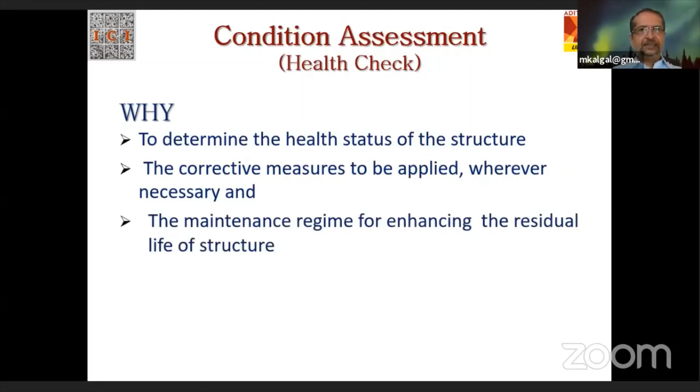To apply some corrective measures wherever necessary. Just like when we do our health check, it is first to check whether we are all right. And if there is something slightly wrong or of concern, we would like to go to a doctor and see what needs to be done or what care should be taken in our day-to-day life. The third thing is to also evaluate what maintenance regime we should undertake so that the residual life of the structure is enhanced.

So again, I will continue the analogy of our health versus building health. When we are diagnosed to have something, maybe diabetes or blood pressure, the doctor will tell us how we should change our lifestyle so that we are able to take control of the situation and live longer. So that is the same thing with the building also.

Sometimes, as far as building assessment is concerned, not connected to human health, we might do this condition assessment to see if there is a possibility of changing the use of the structure. The structure might have been built as a residential building. You may want to convert it to a commercial building, remove a few walls, make the hall bigger, and use it for commercial purposes. Or a part of it you might want to use for storage. So it's possible you may want to change the use of the structure, and hence you may want to see whether it is worthy or possible to do this change and use it for the new application you are thinking of.

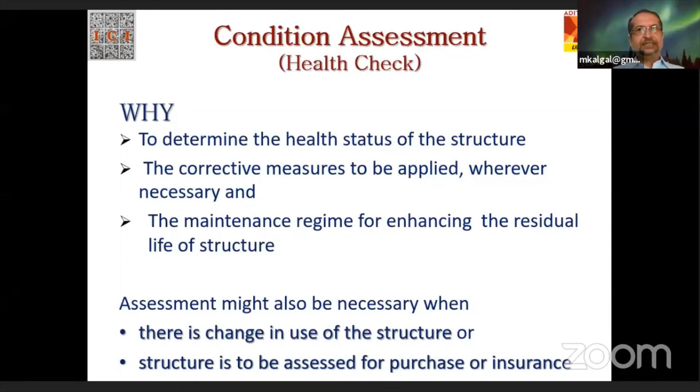So even in a building, if they want to insure it, to decide the premium, they would like to know what is its condition and what is its residual life. So condition assessment or health check is done for various reasons.

Now, what is it that is involved in a condition assessment? First is examination of the structure through comprehensive physical observation. So when you go to a doctor, what does he do? He will first look at you, and then he will probably take the measurement of your heartbeats.

He may keep a stethoscope on you, and he may also ask you a few questions. Same thing, we examine the structure through comprehensive physical observations and then carry out relevant probing tests, like the doctor would do to you. So some tests will be done on the components of the building and constituent materials, and it might be aided by some supplementary theoretical analysis to see what kind of loads, moments and shear are coming on various parts of the building, and in light of that, whether it is capable of withstanding those or not.

So some definitions are definitely required before we go forward. One is the word defect. Now, what is a defect? One of the definitions I found suitable is that defect is a flaw which creeps into the structure because of design mistake, poor workmanship, fabrication or construction, before it begins its service life.

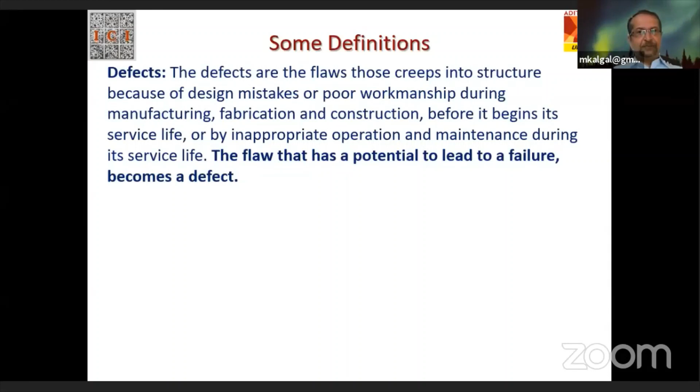Now, what is distress? Distress is a collective term for the physical manifestation of problems. So there can be several problems which are inside. Now, these are shown just like in a body. When it has any problem, the first thing that happens is you get a fever. What does fever mean? It means something is wrong with the body, and the body is trying to fight by raising its temperature.

So the same thing is here. The manifestation of such problems, like cracks, spalling, pop-out, staining, etc., or some signs of corrosion, all of these are symptoms. So distress is a symptom to indicate that there are defects, right?

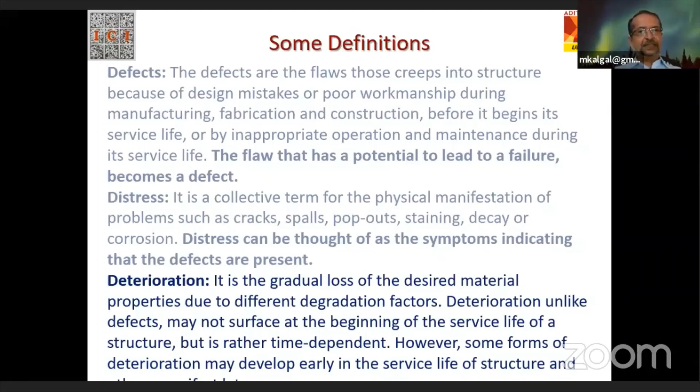So the third word is deterioration. Now deterioration is what? Obviously the English meaning itself will tell you that it is a gradual loss of the desired performance. So the material properties might have got degraded, or there might be issues which might be reducing the strength and service life of the structure. The major thing to remember here is that it is over a period of time, so this is time dependent.

So some small types of deterioration may develop early also, like you have shrinkage cracks, which look as if the concrete is now deteriorating. Actually, it's not deteriorating, but it's a symptom which has come at the early life. But then most of these deterioration issues come a little later in its life.

So what's the objective of the condition survey? It is to identify the causes of distress and their sources. So the first and foremost objective of the condition survey is to identify the causes of distress. Distress can be for various reasons.

As I said, you may get a fever, but it could be for various reasons. You may get a headache, it might be for various reasons. Even an upset stomach can create a headache. So you must know what is the source.

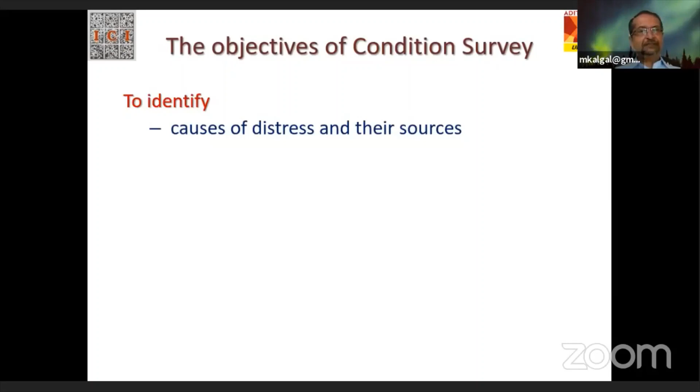So the source of the distress or the causes of the distress have to be identified. That's the first objective of a condition survey. And then it is to assess.

Now, once we know that there is a distress, we have to find out what is the extent of distress. How much is the distress that has spread in the body of the structure, whether it is localized at one place or the overall structure is suffering.

Then once we know that there is a distress, there is a degradation that's happening, we would also like to know what is the strength of the structure. Now, what is residual strength? How long it can withstand? What is the existing structure's strength?

Then the third thing is rehabilitability. That is, whether you can rehabilitate or not will depend on what is the distress and how much is the degradation that has happened. So if a man gets into a hospital with a heart problem, they'll see by doing a bypass whether his heart can come back to near normal or at least 50-60% of the normal capability. If it has already lost all its capability and its efficiency has reduced to 20% or 30%, it is not possible to revive that patient.

So it may not be possible to do any rehabilitation of a building if the residual life is very less or it is in a very bad shape. So this is the second objective. One is to identify, second is to assess.

The third objective of the condition survey is to prioritize which are the elements which are distressed, which is the major distress, which is the one which needs to be tackled first, what is serious, and what needs to be taken up for repairs. So since this entire faculty development program is on repairs and rehabilitation, it's of primary importance for us to do this condition survey to decide on the repair and rehabilitation or retrofitting methodologies.

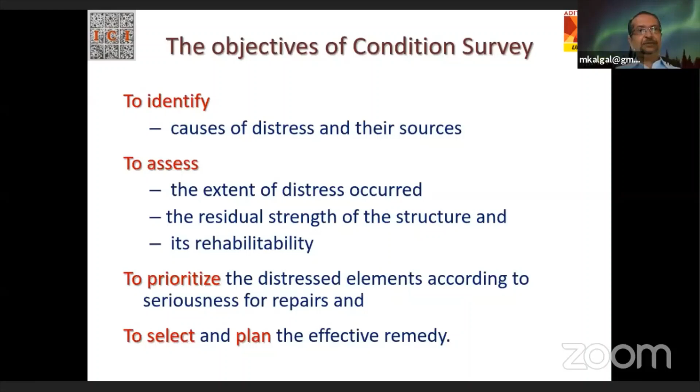So to prioritize which one to do first, 1, 2, 3, 4, 5, you must do a condition survey. Also, it will help you to select and plan the effective remedy. We will see how we can select some of the possible methods of remedy out of hundreds of possibilities that are there. The condition survey will help you to tell which is the one which you should choose, or which set of repair methodologies you have to choose, and what priority you should start doing the repairs.

So the most important thing, as I went on repeating, is to find the cause. Unless you know what is the disease, no medicine can be given. Similarly, we have to first try to find out what is the cause, and then automatically the remedy will be a common sense issue many a times.

What we should realize, just like in human body, in the structure, the cause of distress may be, the source may be somewhere else, and the cause of distress may be something else, but what is seen could be a totally different picture. For example, a simple thing like damp patch. A damp patch could be for various reasons, and the origin of this dampness might be somewhere. It may not be just behind the damp patch. It might have traveled from somewhere. Unless you arrest that source of the dampness, you will not be doing any good to the structure.

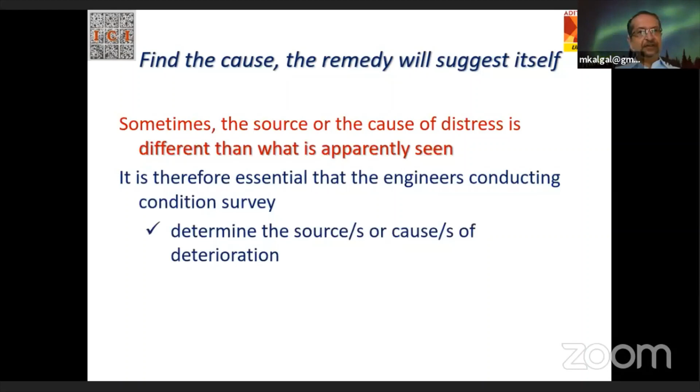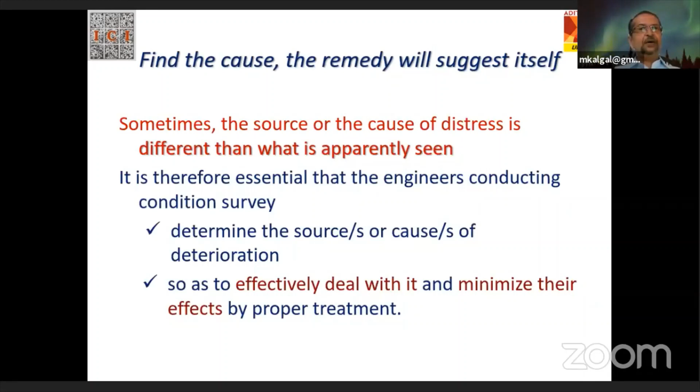But at the same time, you must also realize that it is important for us to find out whether the cause is somewhere else and we should deal with that cause. Unless we do that, the whole thing is not comprehensive.

So the choice of method and the devices that we use for condition assessment itself depends on several factors. The reasons for the test. Why do you want to do this condition assessment itself? That itself will decide what are the methods that I would like to use and what are the devices that I would like to use.

The cost involved, everything costs. So the condition assessment also, how detailed you want to do, how comprehensive it should be, will depend on involvement of several engineers, workmen, equipment, and so on and so forth. So it involves the cost. So how much are you ready to evaluate, spend for evaluation?

Just like when, going back to the human body, the doctor tells you a few tests to be done, and every test will cost you. So depending on your financial condition, depending on the priority of the tests that need to be done, the doctor will decide how many tests should be done, which is mandatory, which is optional, and so on. So the cost involved is an important factor to choose the method and device for condition assessment.

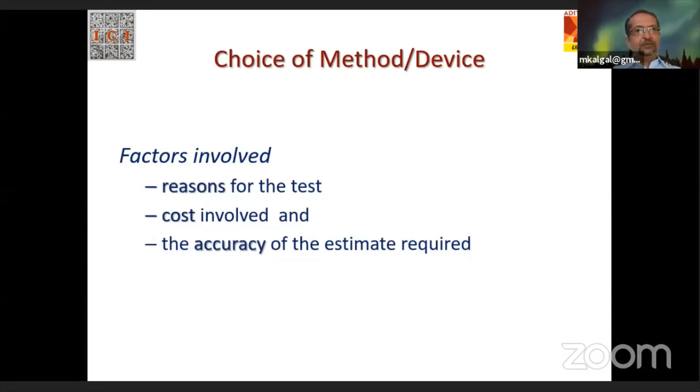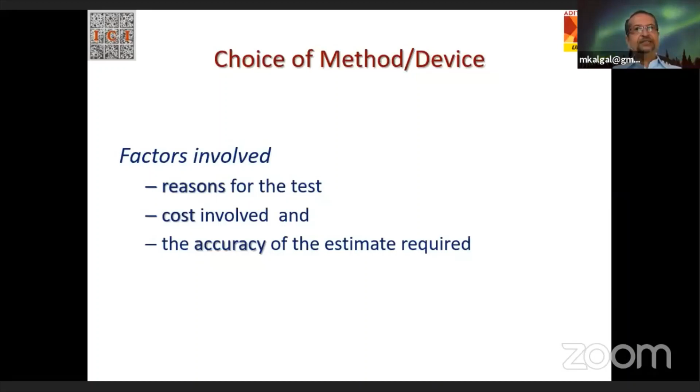The third thing is the accuracy of the estimate. This depends on how sophisticated and detailed your investigation is. If you want to know very accurately the strength of a structure or component, how much deflection has occurred, and whether that deflection is dangerous or going to increase, you will have to do a much detailed condition assessment to get a very accurate result. But if you just want a rough idea, in Hindi they say 'mota moti', whether it is okay, a good engineer can just visit the site, look at it without doing any tests, and give you a fair estimate. So the accuracy also decides the choice of method and device.

So the causes of distress can be many, many, many. It's almost impossible to put a full comprehensive list, but generally we can categorize them. One is the atmospheric effects which cause distress in the structure. It could also be due to the natural aging of the building in the environment it is in.

The major effects are carbonation, chloride attack, sulfate attack, and so on. I'm not getting into the details of how carbonation or chloride affects the structure. This afternoon you will be having a wonderful lecture by a very eminent engineer, M.N. Ramesh, who will give you all the details and chemistry involved in atmospheric effects like carbonation, chloride attack, sulfate attack, and so on. But suffice to say, one of the major causes of distress is atmospheric effects and aging.

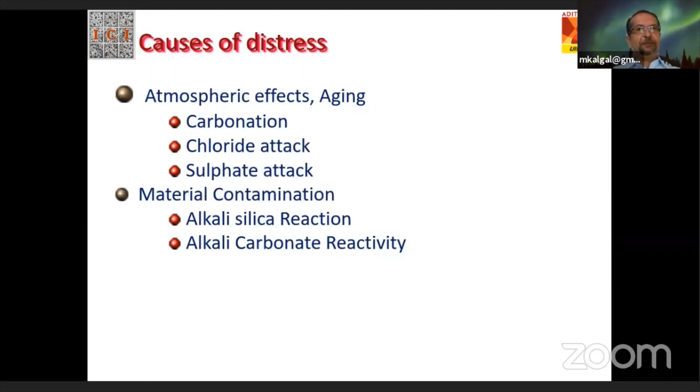Second is material contamination. When you started using the material itself, if it had not been tested properly, there is a possibility of alkali silica reaction, alkali carbonate reactivity, and so on. The third thing is, at the time of construction, if there were some deficiencies, that can also cause problems or distress in the buildings.

There could be a defective design and detailing. The design itself might have been defective, where certain loads were not taken into consideration, or loads were taken in the wrong fashion. Or even if the design is done properly, the detailing might not have been done properly. This also can cause distress.

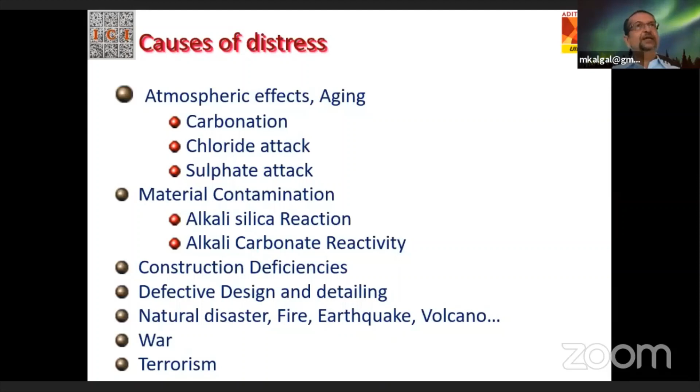It's also possible that although everything is done well, there could be a natural disaster like what is happening now. Nisarga came, before that Amphan came, and there can be cyclones, storms, tsunamis and so on. There could be a fire accident, an earthquake, or in some countries even a volcanic eruption. These are possibilities which might have caused distress in the building. A war, bombings, or due to terrorism, some blast here and there would have also caused the distress. So there are many reasons why distress would have occurred.

So when we do a preliminary investigation, which is a very important part of condition assessment, the goal is to provide initial information regarding the condition of the structure. This initial information also tells you the type and seriousness of the problems affecting the building. It also gives you an idea as to what are the intended rehabilitation techniques that can be applied.

You may think of hundreds of rehabilitation techniques, but it might not be feasible to do it in that structure under the given condition. Let us say it is an operating office or an operating factory - when operations are on, you may not be able to shut down the entire factory and take up rehabilitation. But of course, if it is very dangerous and very important, you may have to do it.

One of the ideas you get from preliminary investigation is the feasibility of performing the intended rehabilitation. It also gives you information on the need for detailed investigation. This preliminary investigation will tell you whether you need to go for a very detailed investigation.

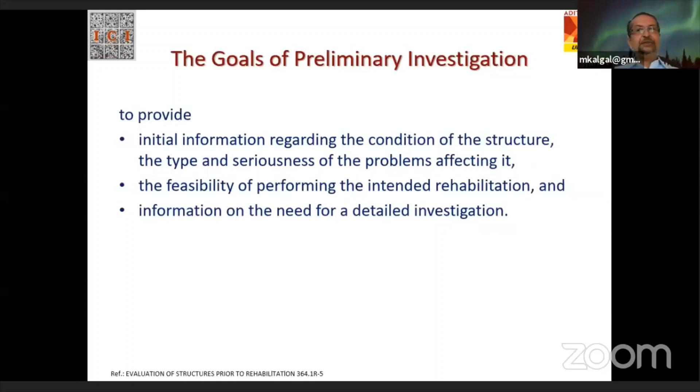It won't work that you just go and see and get the whole picture. So when this preliminary investigation is taken up, because of those objectives, the scope and methodology can involve one or more of the following steps depending on the size and complexity of the project.

The first step is to review the plan, specification, and construction records. Many times the buildings don't have these plans, specifications, and construction records. And even if you have plans, many times changes were made during construction, so you may not have as-built drawings, as-built material specifications, or as-built construction records.

If you can get at least some plan, specification, and records, to that extent you will be lucky. Once you get that, you must go through it thoroughly to understand what kind of building you are going to visit. Before even going to visit, you must look at these records if available.

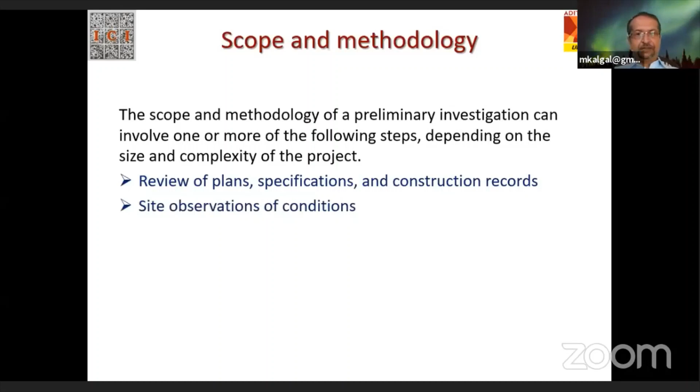Then you must go to the site and start observing the conditions there. It may also be necessary to measure some of the geometrical features to check whether it complies with the drawing, and measure deflections and other things if observed.

The deflection won't be in the drawing, so you have to make some measurements to see what the deflection is, whether it is within limits, how many years have passed, and whether it is due to short-term or long-term deflection.

If there is some displacement of a foundation or a crack in the wall, you may have to take certain measurements, and all these measurements are for assessing the damage preliminarily.

Then you may also go for some non-destructive testing. There are several non-destructive testing equipments—Dr. Balasubramanian will talk about this in detail. So you may carry some of these instruments and do some non-destructive testing there.

The simplest non-destructive testing equipment, according to me, is a hammer and a chisel. Even that is equipment. But an intelligent engineer can get a lot of information from that too. We will look at it in the next few slides.

It's also possible that you may carry a chisel and do some exploratory removal—that is, if you see some stain or something and suspect corrosion, you may slightly chip off some portion to see what it looks like inside. That's called exploratory removal. You're not damaging the structure, but doing some small chipping here and there.

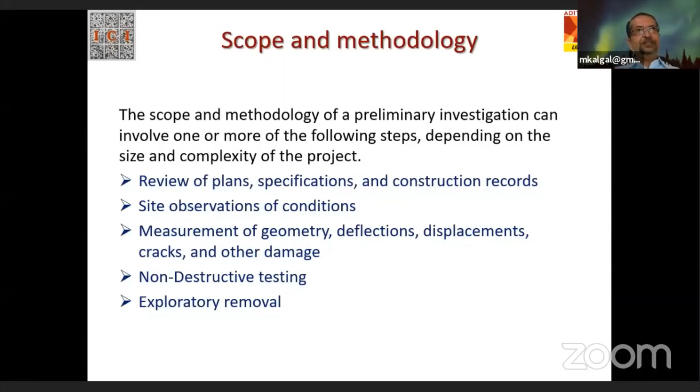You may also do some sampling, testing, and analysis. You may take out some materials and send them for testing, or take out a part of the reinforcement to see whether the diameter has already reduced and the strength has reduced, and so on, and analyze these samples.

The detailed studies are generally not done in the preliminary investigation. They are deferred until a detailed investigation phase is planned. If that investigation is deemed desirable, detailed studies are generally taken up in the next stage.

Now, this visual inspection, when you go to the site, is phenomenally important—the data given when you go there for visual inspection. What is important is that it is a qualitative method, not a quantitative method.

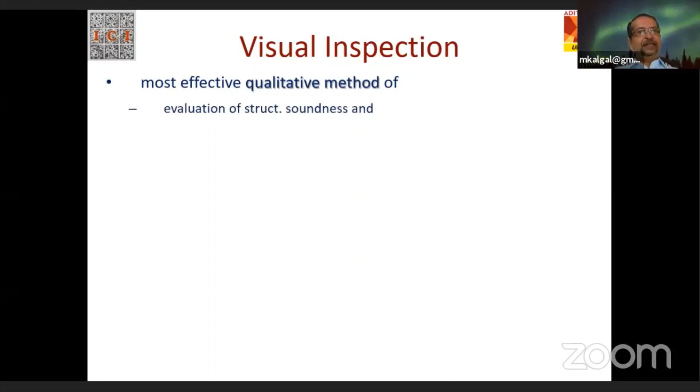Just by looking at it—like some people ask you to go to the site, look at the soil, and estimate the bearing capacity—it's not possible. You can only say whether it is good, better, best, or worst. That is a qualitative method. So visual inspection is a qualitative method. It can give you some idea about evaluation of structural soundness, and it helps you identify the distress symptoms together with associated problems, providing valuable information to an experienced engineer.

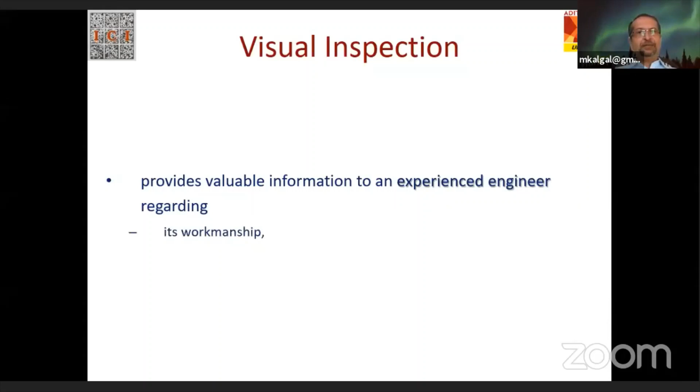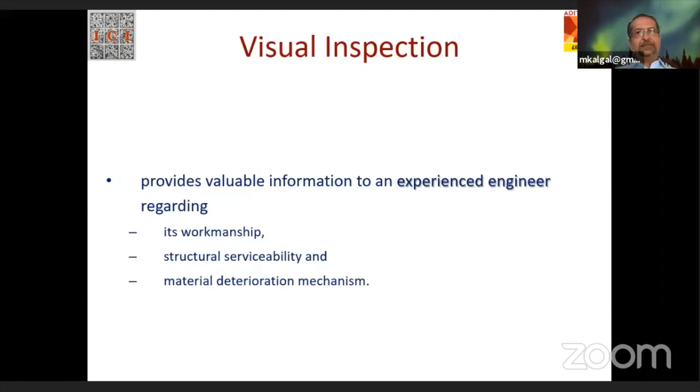It gives you some idea about its workmanship, structural serviceability, and material deterioration mechanism—what is it that is deteriorating the materials there. An experienced engineer, by look, can get some idea. It's also meant to give a quick scan of the structure to assess the state of general health.

So the record of visual inspection is an essential requirement. It's not that you go there and come back as if you have gone for an excursion—no, everything will have to be recorded. This is important because memory overlap is there: when you see something else, you will forget what you have seen earlier. So as you start looking at it, you should start recording what you have looked at and what you feel can be the cause for the problem.

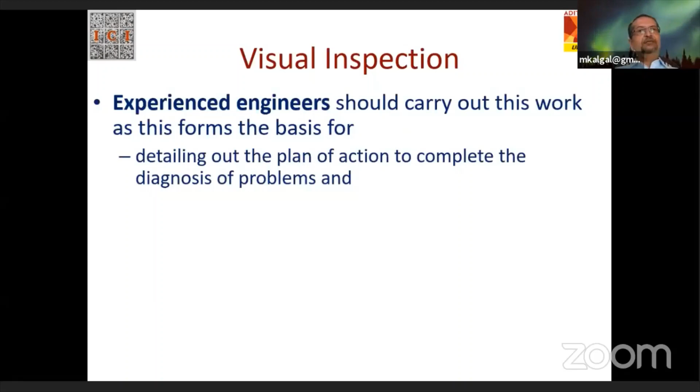This will also help you prepare a realistic bill of quantities for various repair items later. So in visual inspection, it's very important that experienced engineers carry out the work, because it forms a basis for detailing out the plan of action for diagnosis of problems. It also quantifies the extent of distress, and that's very important.

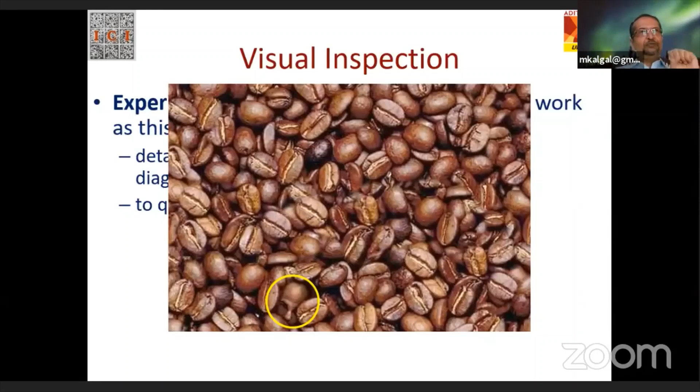What is trying to be emphasized is that there is a difference between seeing and observing. An experienced engineer observes—he will not just see and come. He will know what to look for, where to look for, and how to identify. That's very important in a visual inspection.

Simple tools he will carry, like I said, camera with flash, magnifying glass, binoculars, because he may not be able to reach the place where the distress is. He may carry a crack gauge for measuring the crack width, a chisel and hammer—this is what I meant as the preliminary NDT equipment usually needed. Sometimes, of course, some platform, scaffold, tower, etc. may be required to access the particular place of distress.

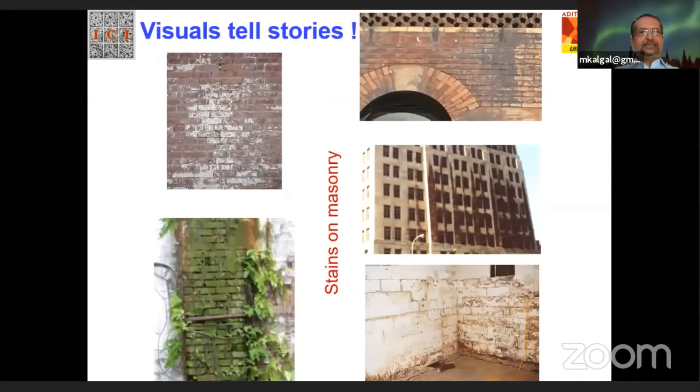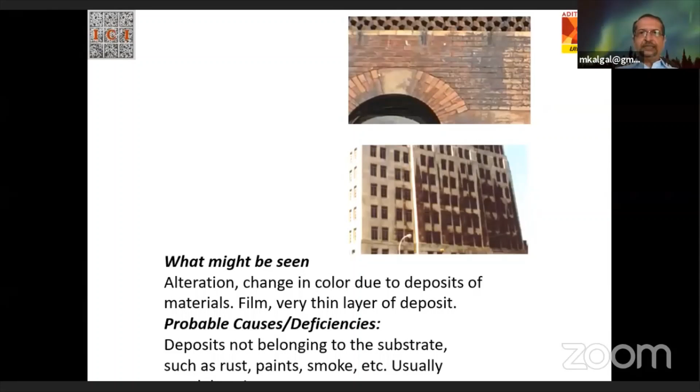Visuals tell stories. An experienced engineer, by looking at the visual distresses, will come to know the stains in masonry, for example—just taking one or two examples. The stains in masonry, which you can see in these pictures, can tell you different stories. For example, the first two, what you might be seeing is some alteration, change in color due to deposits of materials, a very thin film or layer of deposit. The engineer will automatically, immediately grasp that the possible cause is a deposit not belonging to the substrate, like rust, paint, smoke, etc., and he will know these are not very dangerous to the building—it only requires a cosmetic treatment.

If he sees what we call efflorescence—the formation of white substance on the surface, which is powdery, filamentous, or crystalline—he will know this is possibly due to water flowing through the masonry, or from the backing or from the soil. Again, he knows this is not a very dangerous thing; it can be cleaned and continued. And again, looking at the intensity, he will know whether it requires a detailed repair or just cleaning and covering up.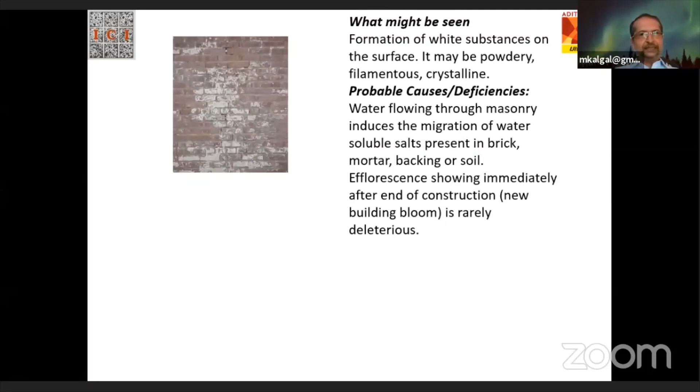This picture—because it's in a basement, a damp patch, changing color—all of this will indicate to him that there is probably a high water table at the back, or water feeding due to some broken pipes, improper waterproofing, and so on. So seeing will give a lot of insight into what could be the issue.

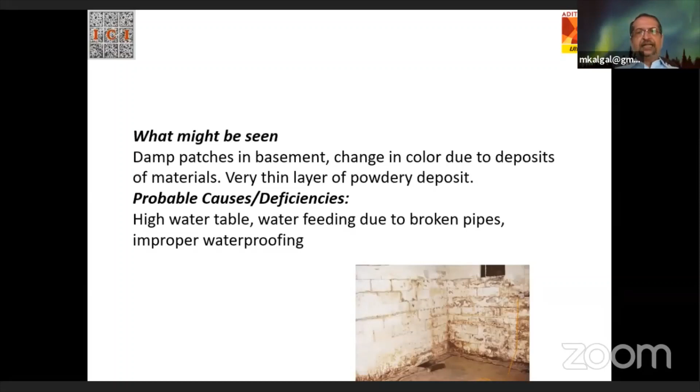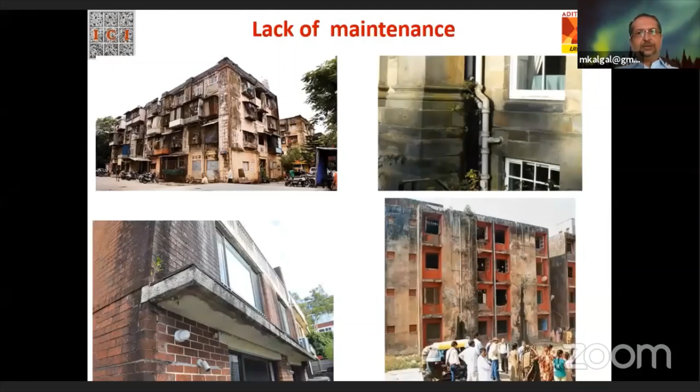If he looks at this kind of scenario, he knows obviously that the maintenance has been absolutely lacking, and hence all of these issues have come. So 99% of these kinds of issues are due to lack of maintenance, or it could be due to poor workmanship. Poor workmanship could be like this: in RCC, inadequate cover due to congestion of reinforcement. There are so many reinforcement rods at the bottom that concrete could hardly come in and give cover to the reinforcement—so obviously the cover fell off.

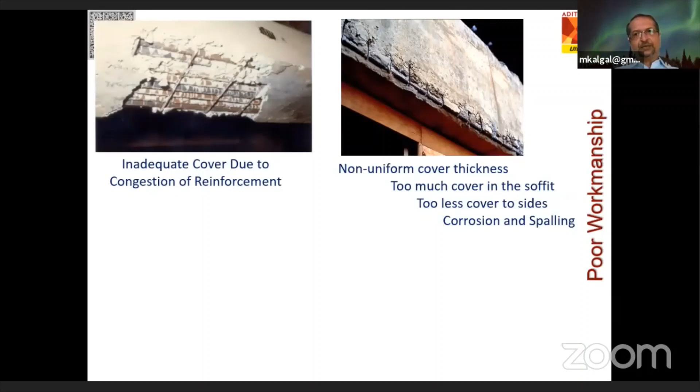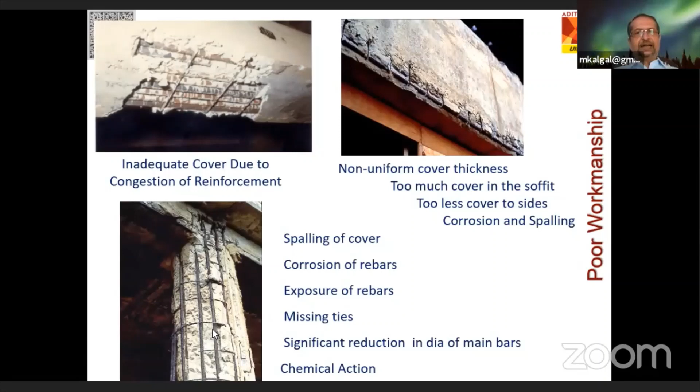By looking at this picture, he can say that this was a construction deficiency or defect. There was more than required cover at the bottom, very less cover at the side, and this has created corrosion and spalling of concrete. When he looks at a column like this, you can see there are so many stories being told - there is chemical action, the cover has spalled off, reinforcement has corroded. You can see these ties are totally eaten away. There are no ties here and here because of extensive corrosion, significant reduction in the diameter of main bars, and so on.

These cracks in concrete are due to various reasons - there are hundreds of reasons for cracks in concrete. If you were to classify, cracks could occur before hardening or after hardening. Before hardening, it could be in the plastic stage - due to shrinkage or settlement, or when it is still not hardened or strong enough, movement of the formwork, subgrade movement, or late jointing might have created cracks. In the hardening stage, it could be physical, chemical, or thermal phenomena - all of these can cause cracks.

Just by looking at a crack, it's not easy to understand the issue, because unless we understand what is the disease, we can't give medicine. Please remember that. It could be due to drying shrinkage, crazing, sulfate attack, restraint shrinkage - all kinds of problems are possible. Chemically, it could be alkali aggregate reaction, corrosion in reinforcing steel, carbonation, and so on. Due to thermal, it could again be high temperature gradient, shrinkage, etc. Or it could even be structural - overloading, improper design, excessive movement, and so on. So cracks in concrete are the most difficult to understand, handle, and repair.

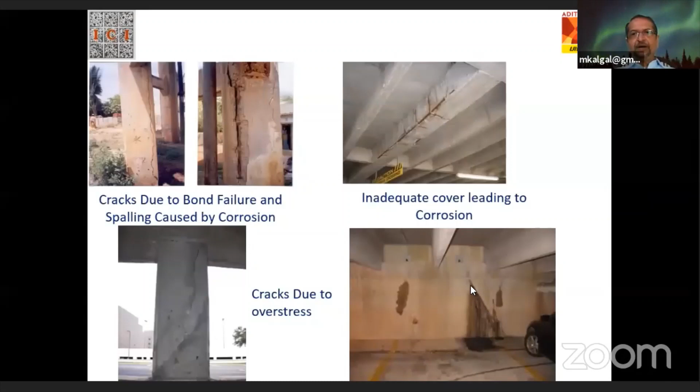You can see some photographs which again emphasize a water tank supporting structure, extensive cracking due to bond failure and spalling caused by corrosion. You can see here there was hardly any cover to the reinforcement, so there was corrosion and spalling. This is a vertical load carrying member like a column. There are cracks here which probably indicate overstress of this particular column, and the column is about to fail. It's also possible that cracks can get compounded due to leakages, like what you can see here in a basement - there is a crack in the retaining wall, allowing water to come inside.

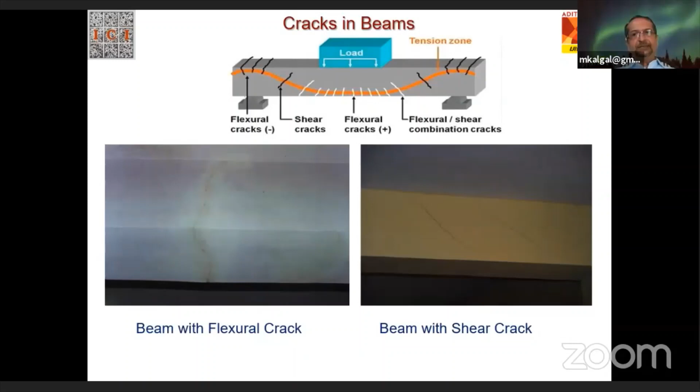There are so many structural members - columns, beams, walls, and so on - so the cracks can be at various places. The fundamental thing to remember is that crack occurs where there is tension. Looking at the position of the crack, the way the cracks have grown, you can understand whether it is a flexural crack or a shear crack and so on. All of you being teachers, I don't have to explain this in detail. So you can see a beam with a flexural crack in the middle at the bottom growing upwards, and a diagonal crack near the support, which is obviously a shear crack.

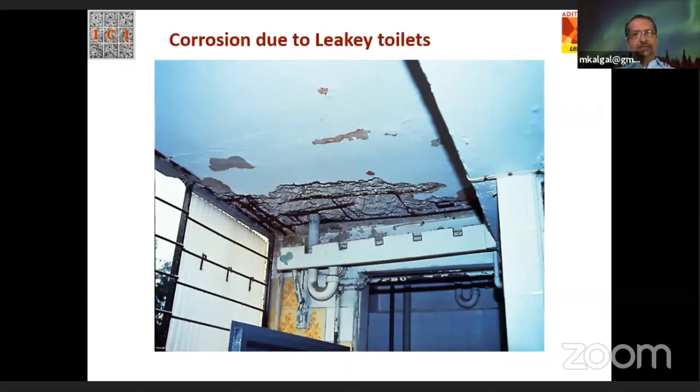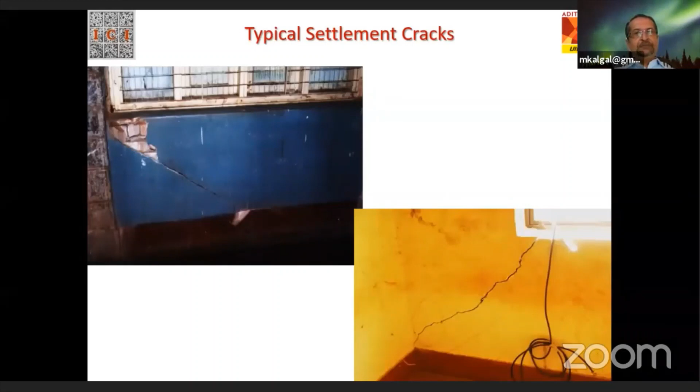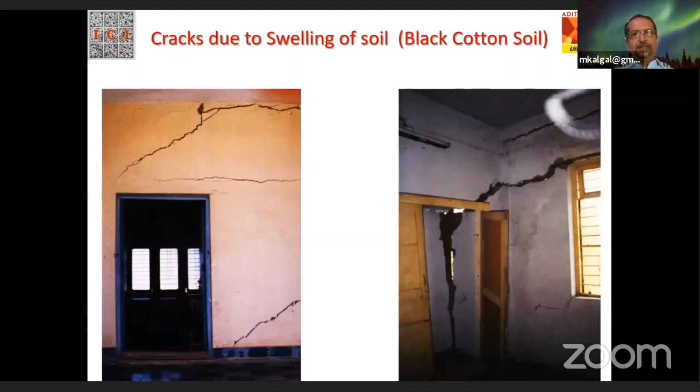It's also possible that some settlement might have occurred, the foundation might have settled. So cracks like this might be seen in a building having foundation settlement, or more importantly, differential settlement. This is a typical photograph of very bad expansion of the soil causing extensive distress. This building is almost worth demolishing rather than repairing. This is due to swelling of soil, that is Montmorillonite or black cotton soil.

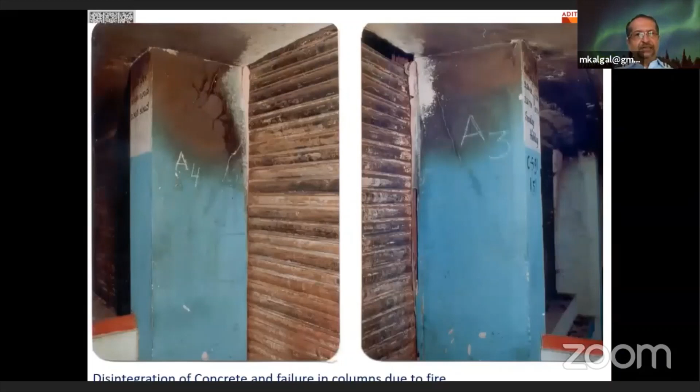This is a typical photograph of fire damage. You can see the column, beam, slab - all of them have spoiled. The temperature has gone beyond a certain level, so the distresses are seen - one in terms of what has fallen off, the other is the color of the concrete, which tells you the kind of damage that has occurred. So this is again some columns, A4, column A3 - some portion of the concrete is already disintegrated, some cracks have come due to a fire accident.

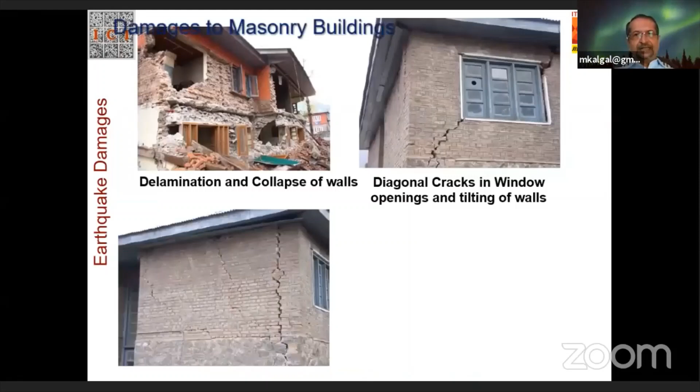Earthquake is very difficult to predict, but it is possible to make buildings somewhat resistant. The most damaged buildings in an earthquake are masonry buildings, which can suffer delamination and collapse of walls, diagonal cracks, vertical corner cracks, and total collapse of random masonry, among other damages due to earthquake.

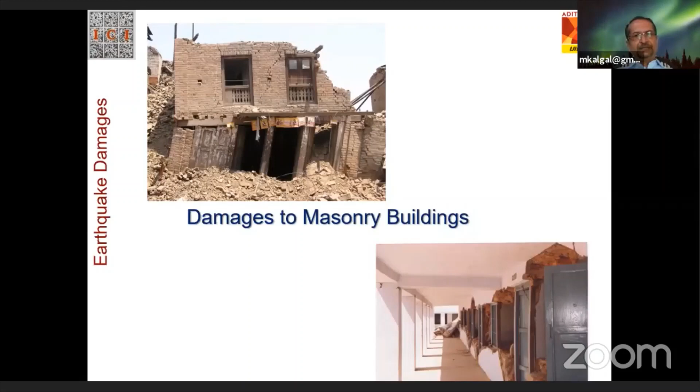If the damages are very bad, probably nothing can be done, but if it is minor, you could look at some kind of rehabilitation even in an earthquake damaged building. Earthquake damage could also cause shear failures in beams and total destruction of columns, and so on.

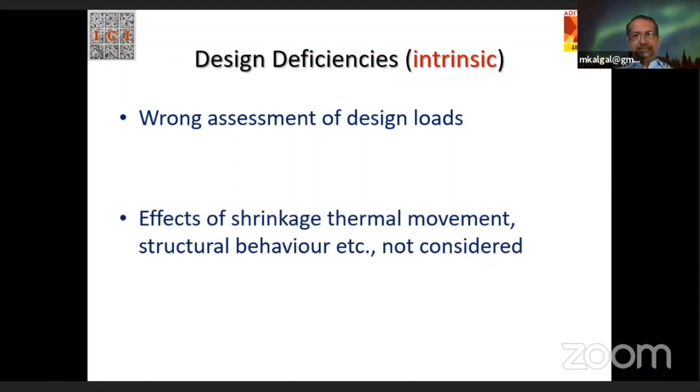So there are two types of distresses or deficiencies. One is called intrinsic deficiency, which is a design deficiency—wrong assessment of design loads, or effects of shrinkage, thermal movement, structural behavior, etc. not considered properly. These are intrinsic, meaning the disease is already built into the structure.

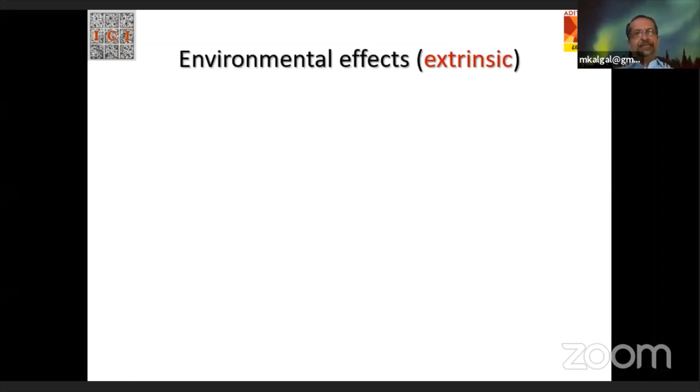There are also what are known as extrinsic deficiencies. These are basically environmental effects—physically, it could be heating, cooling, wetting, drying, abrasion, all due to external agencies causing physical effects on the structure. These are called extrinsic problems. There could also be chemical problems, such as chloride attack, sulfate attack, carbonation, and so on.

Some tests can be done on concrete, but we must remember at the outset that it is almost impossible to obtain a very accurate estimate of the strength of concrete. In most cases, when we are called to the site, they ask, can you find out what is the strength of the concrete? Just by looking at it, it's impossible.

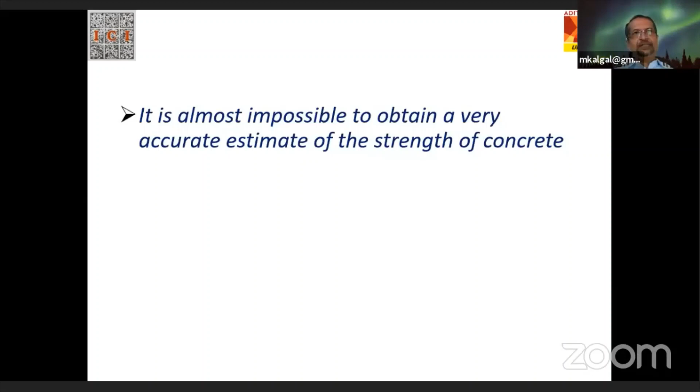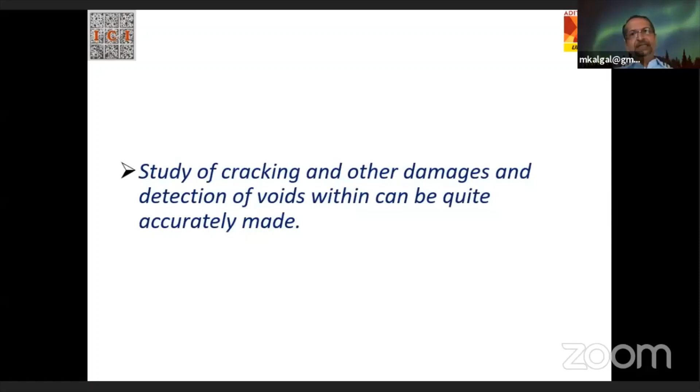Even with tests, it is definitely not possible to give a very accurate prediction of strength. You can come to a reasonable estimate depending on how detailed your investigation is and what data you have. The study of cracking and other damages, and detection of voids, can be made more accurately. The strength of concrete is almost impossible to get with 100% accuracy, but studying cracks and detecting voids can be done fairly accurately with the equipment we have.

So what we should know is the range of tests available, the particular limitations of these instruments, and the accuracy that can be achieved—this is very important.

Anybody can take an X-ray of a human body, but understanding the problem by studying that X-ray requires an expert. Also, if the X-ray is not taken from the right angle, even the expert may not be able to make out the issue. So he should know whether to go for an MRI, an ultrasound, or an X-ray—it is the specialist who decides, depending on his knowledge. There are a range of tests that can be done on a human being.

Similarly, there are hundreds of equipments and hundreds of tests that can be done on a structure. The limitations should be known—how accurate this is, and what the cost effects of doing this kind of detailed analysis are. Once you know the limitations, you will not be disappointed later.

Because tomorrow, if you are asked to do a test and the result turns out not so accurate—say there was a 20% error—if you already knew there could be a 20% error, there is no disappointment. Otherwise, some disillusionment and conflict between the owner and the investigator is likely.

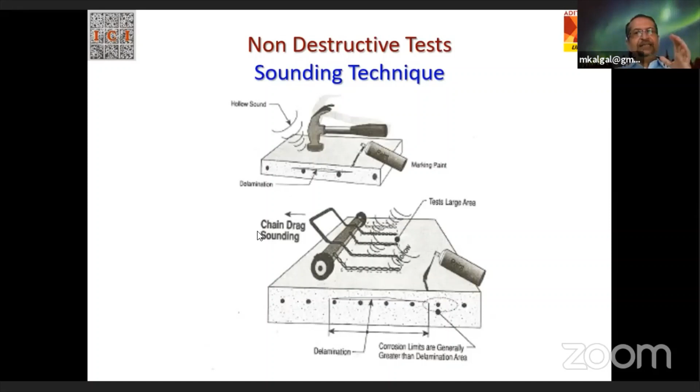There is also another method called chain drag sounding. When you have a very large area, you drag a set of chains on the surface. By closely hearing the sound that comes due to the chain drag, you can decide where there might be a delamination, which could be caused by construction deficiency or corrosion.

In non-destructive tests, there are hundreds of equipments, but the most important ones are called Schmidt hammers, that is the rebound hammer. Dr. Balasubramaniam will deal with this in detail. This is an auto recording rebound hammer. It records on paper or in an equipment, and later there can be digital analysis or accumulation of the data.

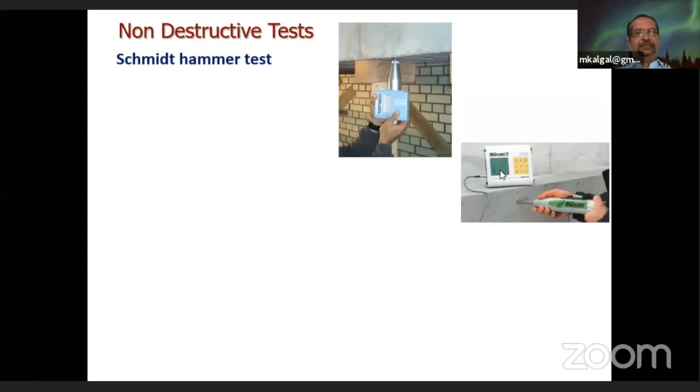There is also what is known as the ultrasonic pulse velocity test. The Schmidt hammer is used to find out the hardness of the material being tested, and hence can relate it to strength to some extent.

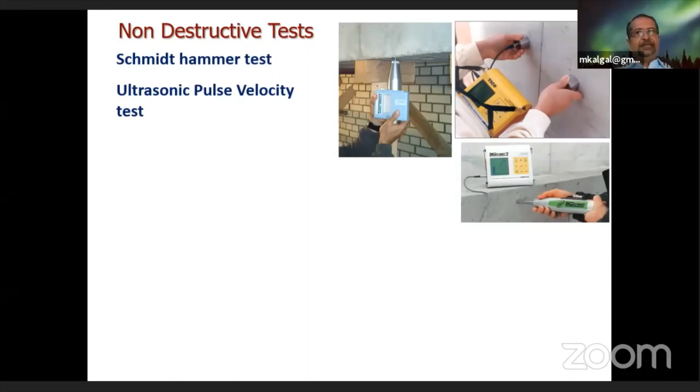Ultrasonic pulse velocity passes pulses into the concrete, and by studying the speed or velocity of the pulse movement, it can find out whether the concrete is dense or not. It will also find out if there are any voids or cracks in the concrete, depth of concrete, and so on.

There is also what is known as a profometer or cover meter, which tells you the depth of reinforcement, the spacing of reinforcement, and to some extent the diameter of the reinforcement. These are important for us to assess when we don't have any drawing, to know the strength of that column or member, whether it is slab or whatever.

It's also important to know where the reinforcements are, because for the pulse velocity test, you should not pass the pulses through the reinforcement. Otherwise, the pulse will pass through the reinforcement and give a false indication that everything is fine. So you should avoid reinforcement when testing concrete.

There is also what is known as half cell potential measurement, which tells you the corrosion activity, how prone the structure is to corrosion, whether it is already corroding, whether it is in a dangerous state, etc. You can find this out from the half cell potential meter.

You can also take a core of the concrete at places where you have doubt, which gives you a physical view of what is there in the depth of the concrete. By testing the core, you can also find out the in-situ strength of the concrete.

You can do a load test of a particular panel to see whether it can take the load. These are all non-destructive tests and they will not damage the structure. Core testing, yes, small cores will be damaging, but then you can always fill it with very high quality concrete at that particular place.

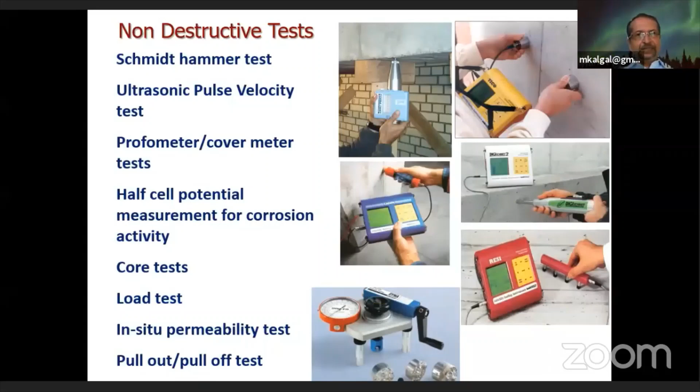So the results of the preliminary investigation should be summarized in a report, which will include structural capacity check, project feasibility, identification of structural problems, strengthening requirements, and needs for further investigation. So just after the preliminary investigation, a report should be made.

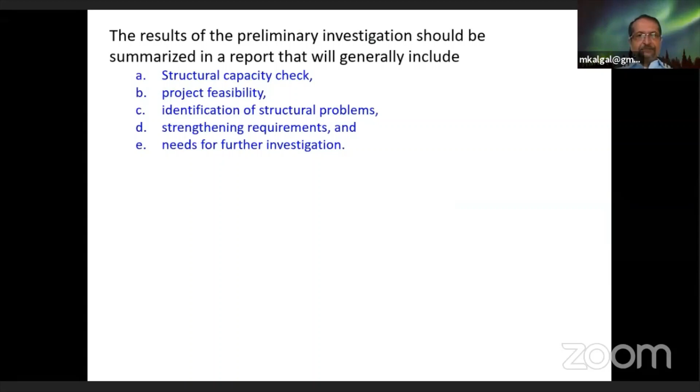It should have all of this: structural capacity check, project feasibility, identification of structural problems, strengthening requirements, and needs for further investigation. There is an ACI document on evaluation of structure prior to rehabilitation, 364.1R, which you can go through. There are also many Indian publications, like the CPWD Handbook for Repairs and the National Institute of Disaster Management guidelines, which you can use to get a full idea of structural or non-structural evaluation.

The structural capacity check generally gives us an idea whether the structure or individual members are adequate for the intended use. They may be adequate for existing loads but not for intended use—that is, when you are changing the use of the structure. This may indicate that you have to go for some kind of retrofitting.

The analysis can also be inconclusive—you may not be able to draw any inference—but getting some idea about structural capacity is one primary aim of preliminary investigation. Depending on the results, the adequacy of the structure must be established. It may also be necessary to propose immediate action to deal with conditions affecting safety—if there is imminent chance of collapse, you may have to immediately support the structure and take adequate action, like evacuating people.

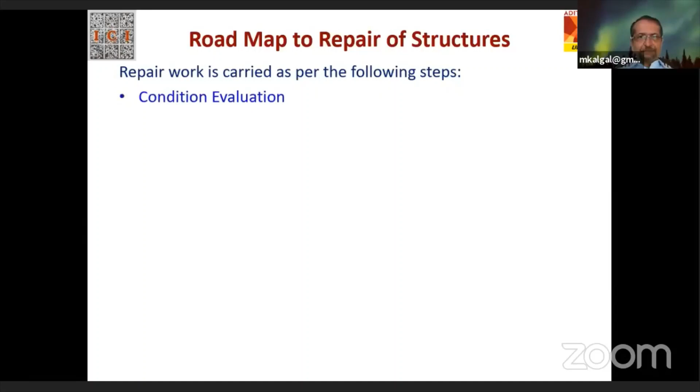The roadmap to repair of structures consists of the following steps: condition evaluation, determination of the cause of deterioration, selection of repair materials and methods, preparation of drawings and specifications, bid and negotiation process, execution process, and appropriate quality control measures. This is the roadmap for repair.

We have done the analysis, evaluation, preliminary and then detailed. After that, when planning repair of the structure, the repair work is based on condition evaluation, determination of deterioration, and selection of repair methods and materials—there are hundreds of repair materials and several hundreds of methods. Whatever is chosen, you must prepare drawings and specification for it.

Only when you do a drawing and specification can you call for a bid, and once the bid is called, the bidder should be clear as to what is involved—he can't just give some kind of bid. There should be a scientific negotiation process, not just saying 'can you do it at 50% of the cost.' You should ask him for a rate analysis, find out whether it is reasonable, and negotiate scientifically and systematically. If you over-squeeze, he will compromise on his repair methodology.

It's just like going to a roadside doctor or quack and getting medicine instead of going to a specialist. In the long run, you will end up paying more than what you could have spent for a specialist.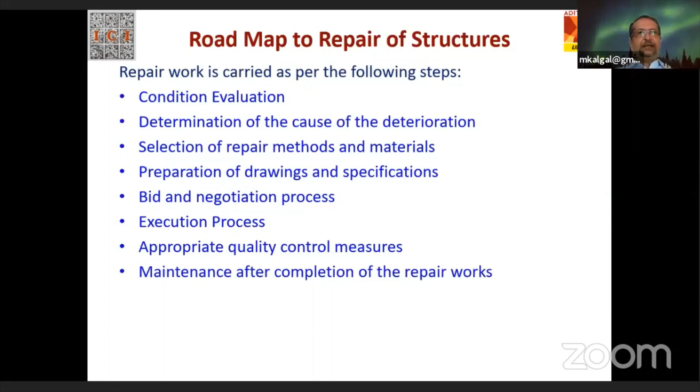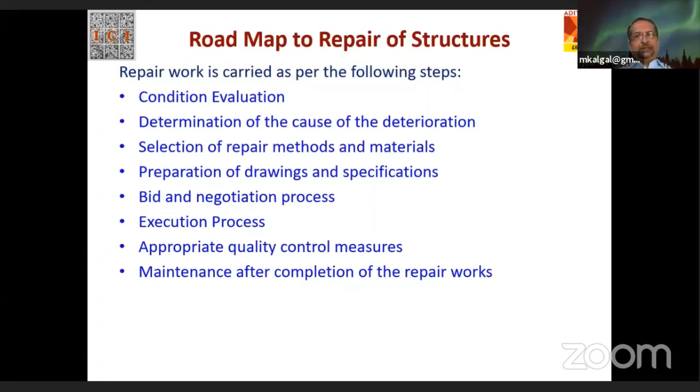The execution process also requires planning—there may be some change of occupation to be done, some barricading, and so on. When this is happening, how do you ensure appropriate quality control measures are in place? All of this will be there in the roadmap for repair of structures. Also, at the end of the repair, you must make a maintenance manual outlining the minimal maintenance needed after completion to make sure the building lasts longer.

To select repair materials for concrete, the essential parameters we look for include low shrinkage properties, requisite setting and hardening properties, workability, and good bonding with substrate. Other performance parameters include compatible mechanical properties and strength to that of the substrate, possibility of allowing relative movement of the expected repair area, minimal or no curing requirement, alkaline characteristics, aesthetics to match the surroundings, and cost effectiveness.

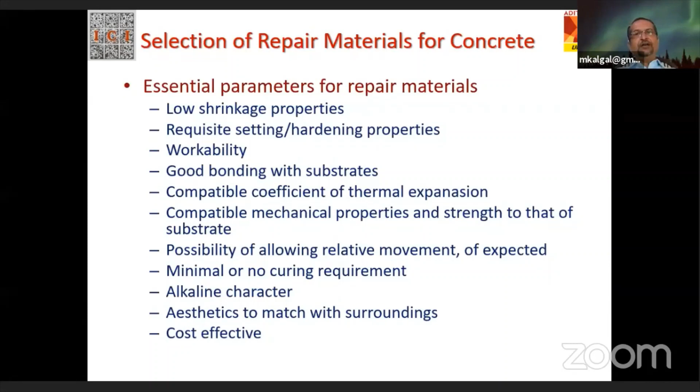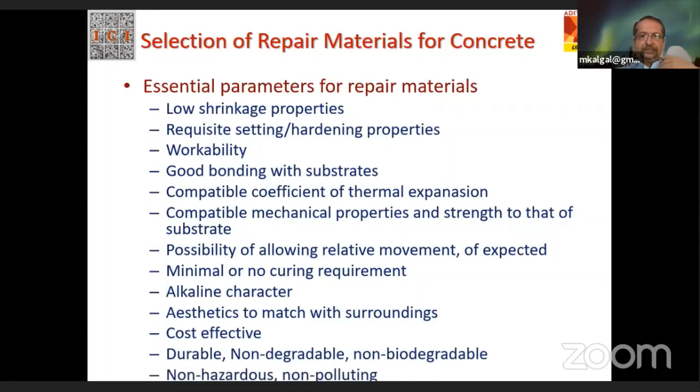I'm not saying all of these are the requirements. Some or many of these could be the requirements for choosing the material for repair of concrete. It should be durable, non-degradable, non-biodegradable, non-hazardous, and non-polluting.

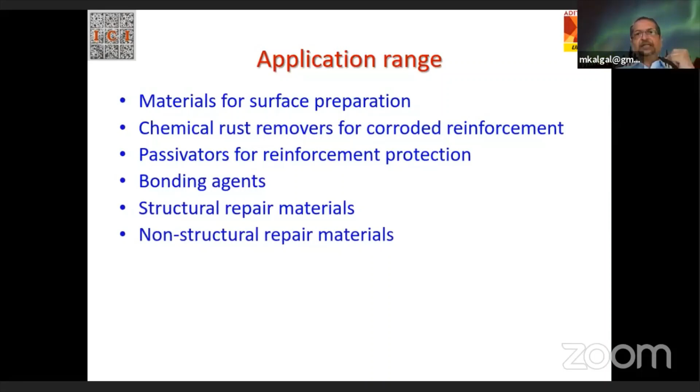The application range includes materials for surface preparation, chemical rust removers, passivators for reinforcement protection, bonding agents, structural repair materials, non-structural repair materials, injection grouts, joint sealants, and surface coatings for protection of RCC. Depending on the application itself, there can be various classifications of repair materials.

These are marketed under different brand names. You can't make out what is what. There is so much confusion, and so much product literature that they give.

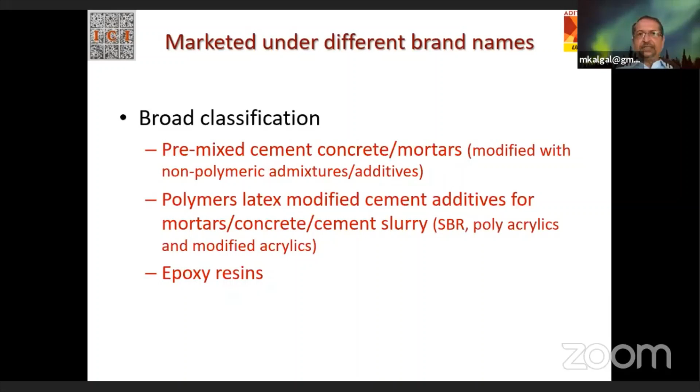The broad classification of these materials is that they are either pre-mixed cement concrete mortars modified with some kind of admixtures or additives, or polymer latex modified cement additives for mortars, concrete, and slurry, like styrene butadiene rubber, polyacrylics, modified acrylics, and so on. Or they could be epoxy resins, or chemicals for corrosion inhibition and removal of rust, and so on. So although they are under different brand names, they are basically under this classification.

So the repair methods, once you've chosen the materials, then the repair methods. Of course these are interlinked. The repair method decides what material to buy, and the material you have selected depends on the repair method you have chosen.

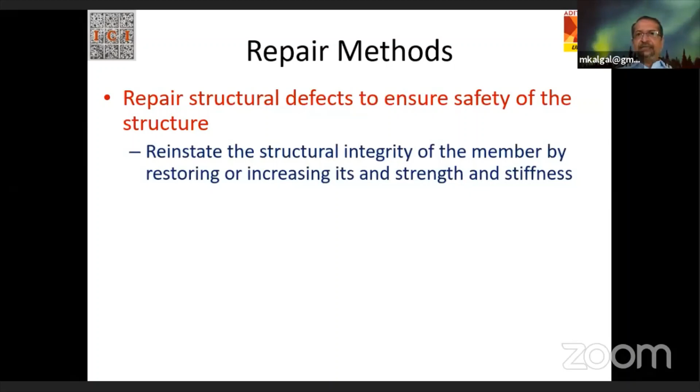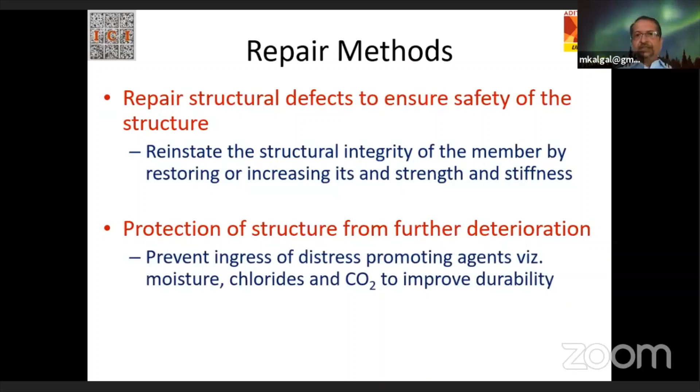The repair methods could again be repair of structural defects to ensure safety of the structure, that is, to reinstate structural integrity of the member by restoring and increasing its strength and stiffness. Or it could be for protection of structure from further deterioration, that is, prevention of ingress of distress-promoting agents like moisture, chloride, carbon dioxide, etc., so that you can improve the durability and maintain the aesthetic appearance of the concrete surface.

And the options are plenty. If I start reading, this will take time. But right from grouting to replacement of concrete, to concrete overlays, to realkalization, to electrochemical methods, to waterproofing, most of this will be covered by engineer M.N. Ramesh in the afternoon. So these are the repair options depending on what the disease is.

The medicines are many, and medicines come from various companies, right? So the same thing applies here also.

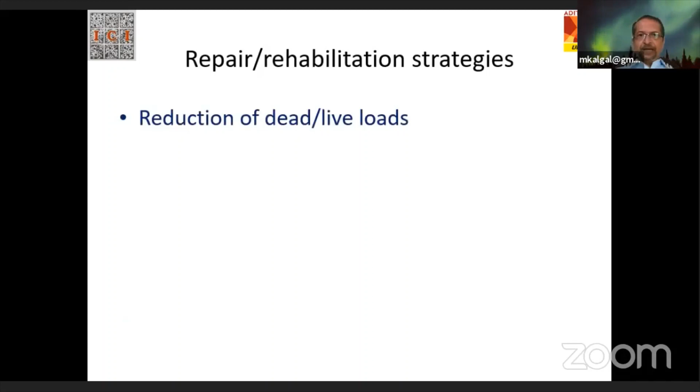So rehabilitation strategies might be that you want to reduce the dead and live load. You may repair and strengthen the columns, beams, and slabs. You may want to improve the compressive strength of concrete. You may be wanting to attend to the cracks and joints - these are more in concrete structures - and improving the structure's ability to resist earthquakes, etc.

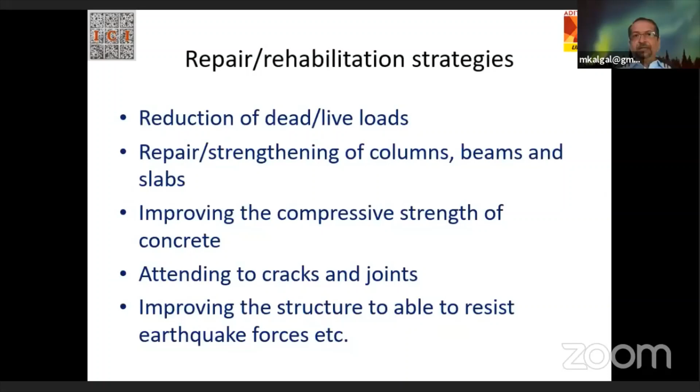So these are some of the strategies of rehabilitation that you may choose, and the repair that might be taken for it. In conclusion, I would like to say that there are various causes for distress in structures, both intrinsic and extrinsic - that is, it could be internal, like a baby born with a disease, or it could be affected by the outside environment.

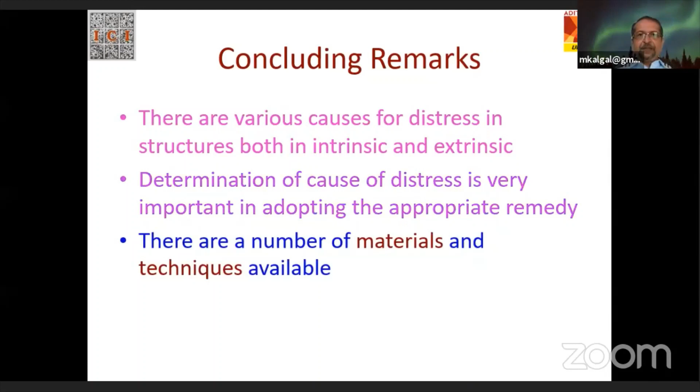Determination of the cause of distress is very important in adopting an appropriate remedy. So unless you determine the cause of distress, don't ever think of doing any remedial measures. There are a number of materials and techniques available, and for a proper repair strategy, you must plan based on all the data you have collected - what you want to do, how much you are ready to spend, how critical it is, and what is the benefit of doing these repairs. All of this will decide the repair strategy. If you don't do it properly, the whole thing might be a waste, and you may start redoing the repair once again, which is an extremely costly affair.

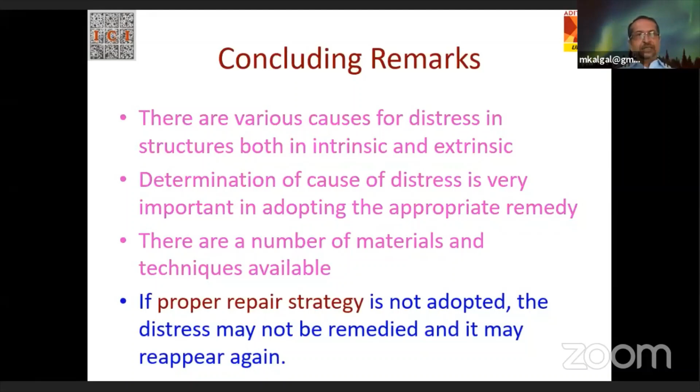So for the right solution, we don't have to look or search anywhere - it's right in our head. So the best solution is always the simplest one. Thank you very much for your patience.